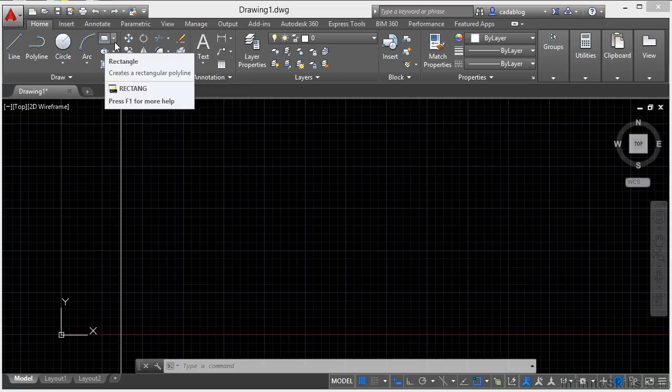For example, the Draw panel here in the Home tab has the commands you need to draw lines, polylines, arcs, circles. As you can see, the line command, polyline, circle, arc, rectangle, center ellipses, and other items. If you look at the Annotation panel, you'll see here you can create dimensions, leaders, tables, and text.

To switch between tabs, you click the tab that you want to work in. So click Insert, then click on the Insert button to use the Insert command.

If you aren't sure which command icon is for which command, just hover over it. This will pop up a balloon called a tooltip. And if you hold it there a little longer, an expanded tooltip will show up, giving you more information about that command, tool, or setting.

These are very handy, especially when you're first learning to use AutoCAD. The tooltips will give you the name of the command and a short description of it. If you want to learn more about the command, there is a link inside a lot of the tooltips to get you to the help screen.

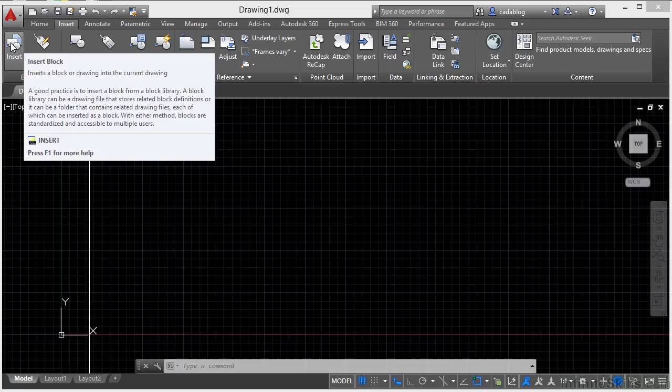Or as you hover over any one of these tools, press the F1 key to bring up the help system for that specific command. Some of the panels collapse, meaning that they shrink so as to give you more room on your screen. If I go to the Home tab, you can see a lot of these here are shrunk down: the groups, utilities, clipboard, and view.

As I hover over them, they will pop out and expand, showing us exactly what's in that panel. To activate a command, you simply go to the tab and then to the panel that you want, hover over the icon, and then left-click on it.

Now, some of the commands, like the circle command, have fly-out icons. You can tell because there's a little arrow here. Arc has one, and then these commands have one as well for the rectangle, the ellipse, and for hatching. To access the flyouts, you just click the arrow and another window will pop up showing you the other options for that command.

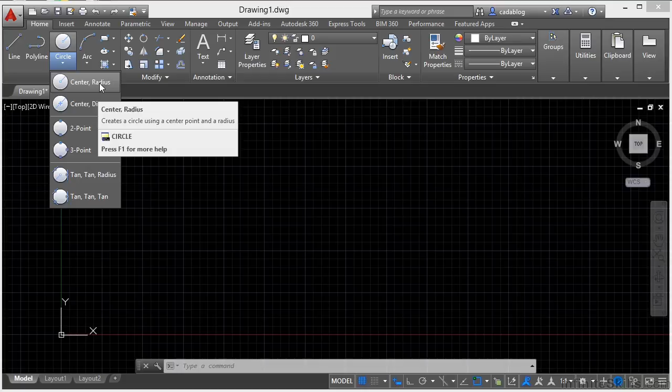Now there are a lot of different ways to draw a circle, and these different commands in the flyout give you the ability to draw a circle in that way. Same way with an arc, or with a rectangle, or a polygon.

Now, the rectangle and polygon aren't flyouts for that specific command, but they are flyouts for similar commands that you might want to use. This is done because you don't always need the polygon command, but you want it and want to be able to use it, so you can get to it quickly this way, and it saves them some room.

Now, some of the panels have style managers. For example, if I go to the Annotate tab, and I go to the text, or the dimensions, or the leaders, you'll see this little diagonal arrow in the bottom right-hand corner.

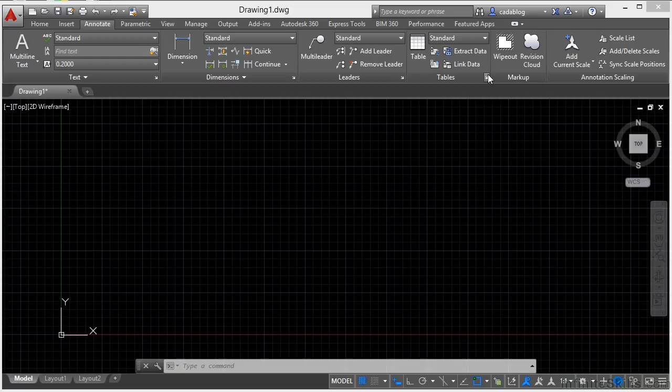This is the style manager for your text. This is the style manager for your dimensions, for your leaders, for your tables. So if I left-click on that, it will open up the text style manager.

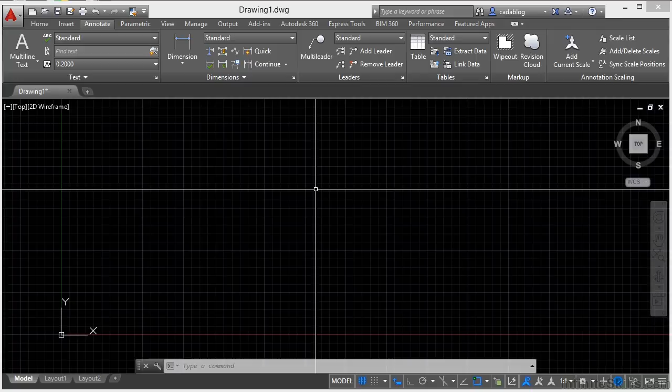Now there is another type of tab that will show up in the ribbon from time to time, and they are called contextual tabs. These tabs are not accessible at the moment, but they will show up when a certain command is activated. These tabs will contain tools that you will not need or be able to use during your normal working conditions. But the contextual tabs have tools in them that you will need in special cases.

One example is the Hatch tool. So if I go to the Home tab and I want to create a hatch, I click on the Hatch command, and this will bring up the contextual tab for hatches. As you can see, it pops up. It's kind of highlighted in blue right now, so it tells you, hey, this is where it is.

Now I can go to one of these other tabs if I want to, and it's going to remain up here until I cancel out of the command. This gives me all the tools, settings, and options that I need to create a hatch.

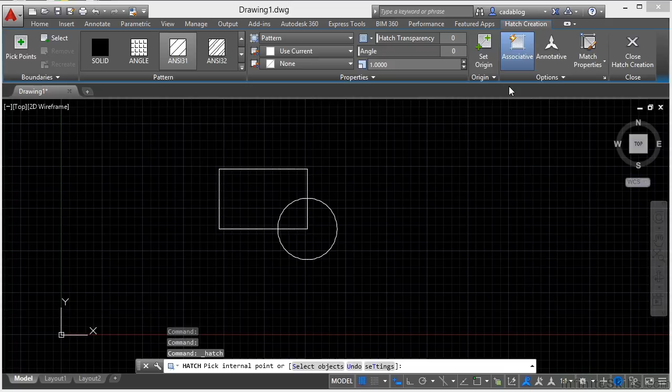I can also manipulate the hatch as it's already started, changing some of the things in it if I'd like, or going on and creating a new one. Once you finish your command, that contextual tab will go away. As we come across these contextual ribbon tabs throughout the video, I'll make sure to point them out to you.